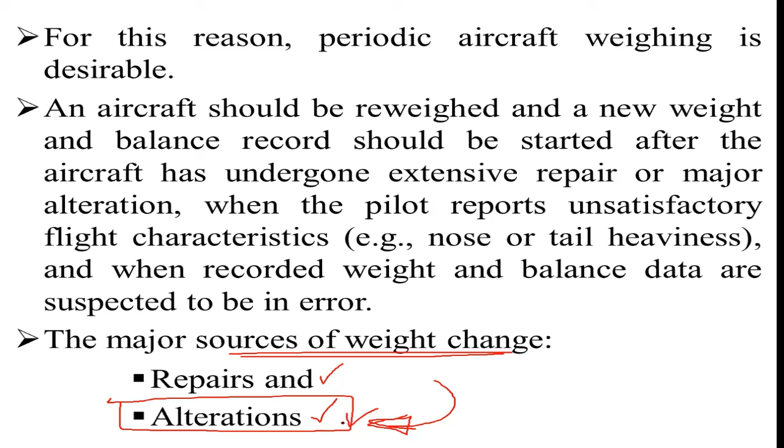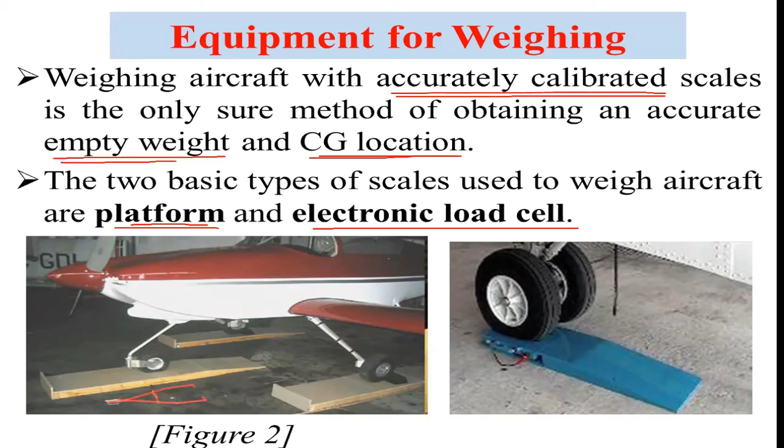Based on the type of aircraft, there are different types of weight and balance performing or supporting equipment. The two basic types of scales used to weigh an aircraft are platform and electronic load cell scales, found on the airfield, runway, or airport. These ground support technicians, technically called flight dispatchers, have this equipment depending on the type of aircraft. There are two basic types of scales used to perform the weight and balance activity. Platform scales, as you can see in this figure, are also called ramp wheels. They are usually a modified version of a platform scale. This ramp wheel, as shown in the second figure, is different from the platform scale in the first figure.

This modified type of platform is low profile, easy to handle, and safe. It's also reliable - the data or information it gives us is very reliable, and the equipment is easy to handle, as you can see.

This platform, as you can understand from the name, is a flat plate. The aircraft's main wheels or landing gears will be here, and data will be delivered through the cable, which you can read from this equipment.

So how this is performed: you tow or push the aircraft wheels or skids onto the scale pad at ground level. First, the place where the aircraft's weight and balance will be performed should be level and straight - you must check that. Then you push or tow the aircraft and put it on this scale.

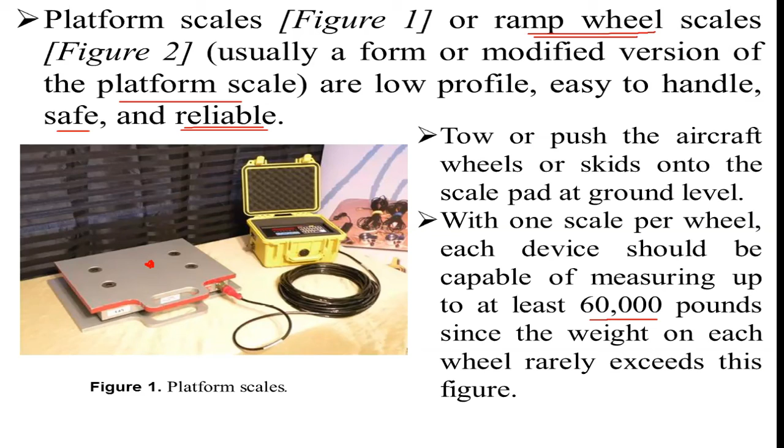Whereas when we use this electronic load cell, the aircraft should be clear off from the ground by using the jacks or hydraulic jacks. So the main difference is this one, but they are of course similar.

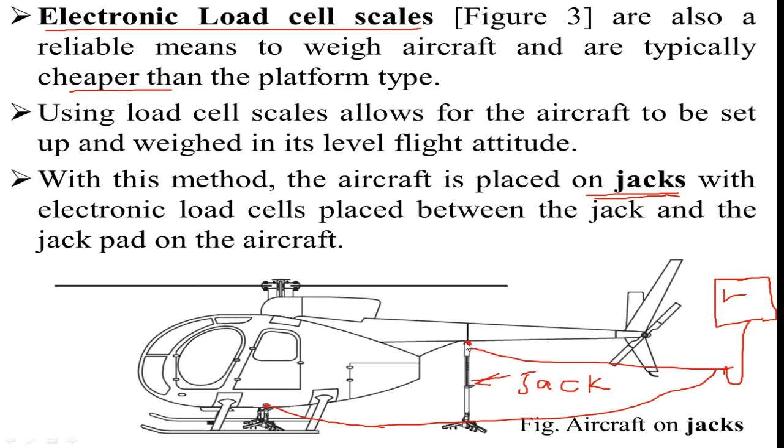And the cable will be where? Or the data cable will be on the jack point of the aircraft, so that the data will be delivered to the display based on this. Is it clear?

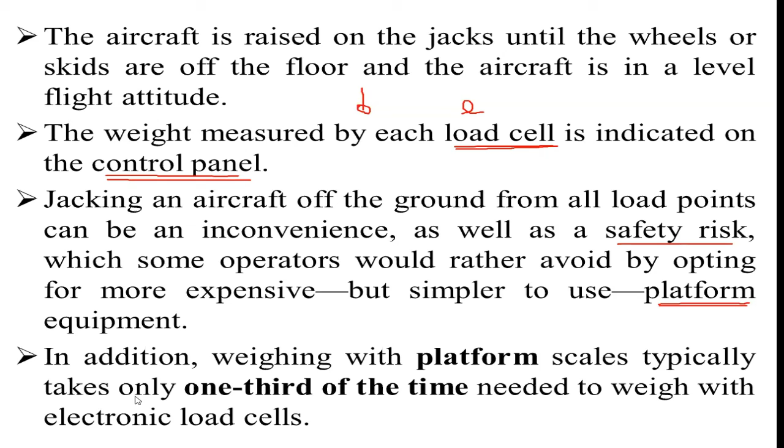So in terms of time economy also, this platform scale is more efficient than the electronic load cell type of equipment. It's one third of the time which will be taken by this one compared to the other. So in terms of time economy, this is faster than the electronic load cell one, or it's preferred.

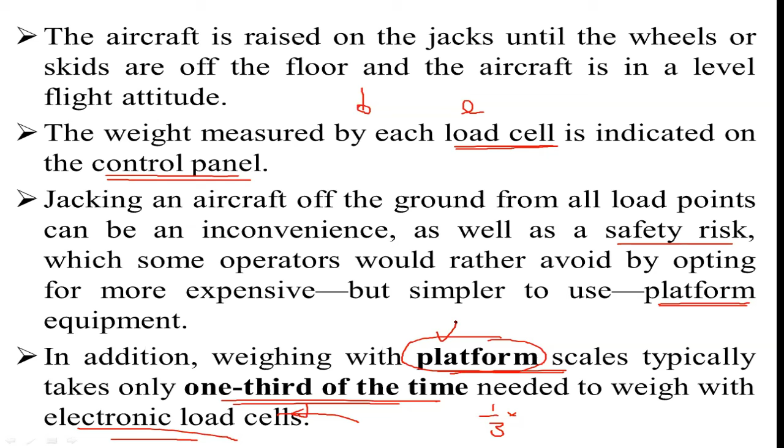All scales for aviation use, manual or electronic, whatever, must be used and protected with safety. Of course, you are already aviation personnel, joining aviation, so any equipment related to aviation, any document, manual, or electronic equipment must be protected when stored or shipped, and they must be checked periodically.

So this equipment, in order to work properly or to be used for a longer time, should be stored according to procedures and rules.

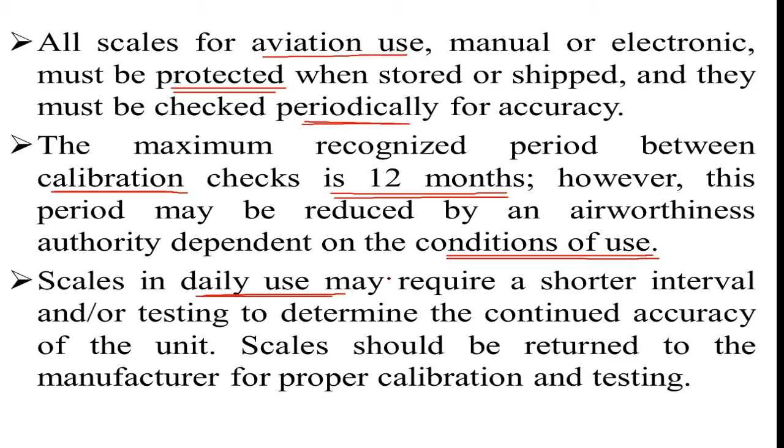Equipment that is not used periodically should at least be checked within 12 months maximum. Scales should be returned to the manufacturer for proper calibration testing. Any scale, gauges and other equipment used in the aviation maintenance environment should be returned to calibration stations or calibration centers based on the requirement.

So, preparation for weighing. In general, weight procedures may vary with the aircraft and type of weight equipment employed.

In general, the procedure we follow for aircraft weight and balance may vary from one aircraft to another, and may also vary based on the weight equipment we use. But in general, the procedures we follow are almost the same for every aircraft. However, there may be certain things that differ from one aircraft to another, so we have to follow the proper document for that specific aircraft.

So our first step when preparing to make aircraft weight and balance is to get or make ready the proper document related to that particular type of aircraft weight and balance. Getting the proper document connected with the aircraft will be our first procedure.

The weight procedure contained in the manufacturer's maintenance manual should be followed for each particular aircraft. As we discussed before, not only this document related to weight and balance, which is our topic for today, but also documents for all systems - hydraulic system, which we discussed in the first semester, landing gear, control system and so on - each document you have to get within the aircraft. So the weight and balance procedure contained in the manufacturer's maintenance manual should be followed for each particular aircraft.

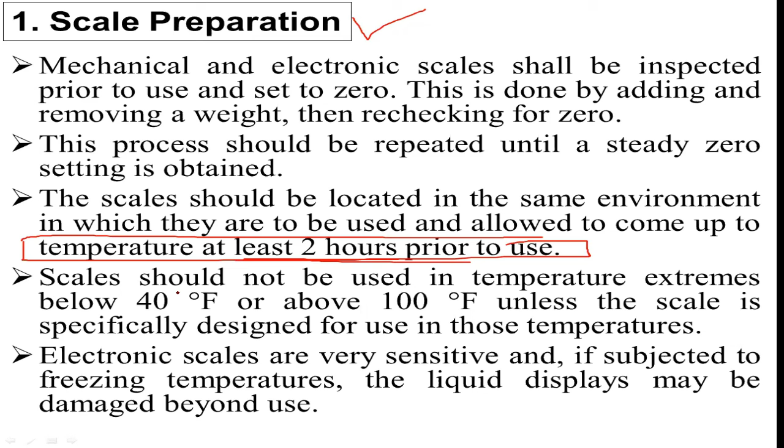The second step is to weigh a clean aircraft inside a hangar. So the aircraft weight and balance should be done also inside a hangar.

It should be worked on inside the hangar because in the outside environment there is wind, rain, or other conditions that can create or cause an error in our weight and balance calculations. So it is advised and recommended to do this weight and balance calculation of an aircraft inside a hangar. The aircraft should be weighed inside a hangar where wind cannot blow over the aircraft surface and cause fluctuating or false scale readings.

The aircraft should be clean inside and outside, with special attention paid to the bilge area to ensure that no water or debris is trapped. The outside of the aircraft should be as free as possible of all mud and dirt. Various unnecessary external agents, like mud and dirt, should be cleaned off.

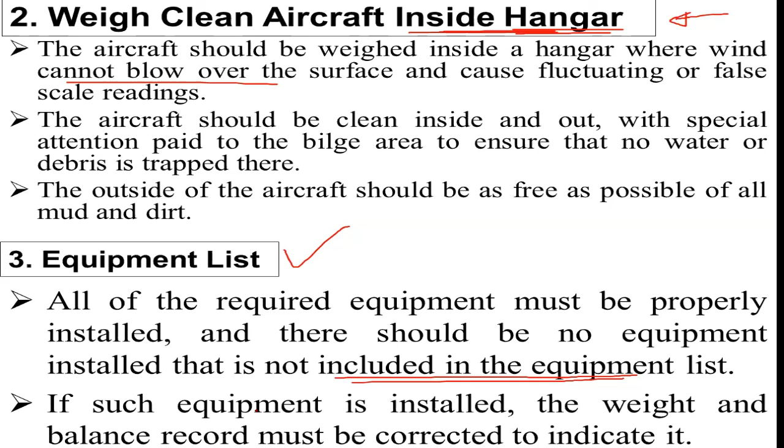Ballast is normally a kind of weight installed on aircraft to make the weight and balance of an aircraft correct, that is, additional weight. So all required permanent ballast must be properly secured in their proper place.

All temporary ballast must also be removed. There are temporary and permanent ballasts. These permanent ballasts are provided by the aircraft manufacturer, but sometimes we can also put a temporary ballast to bring our aircraft balance and weight to the desired or required limit by adding some additional weight. So the temporary ballast should be removed, whereas the permanent ones should be placed in their proper position.

Because the CG range provided by the manufacturer will normally be based on the permanent ballast. These ballasts are normally heavy material, carried in the hold of an aircraft, especially one that has no cargo, to give the aircraft increased stability, and this is called ballast.

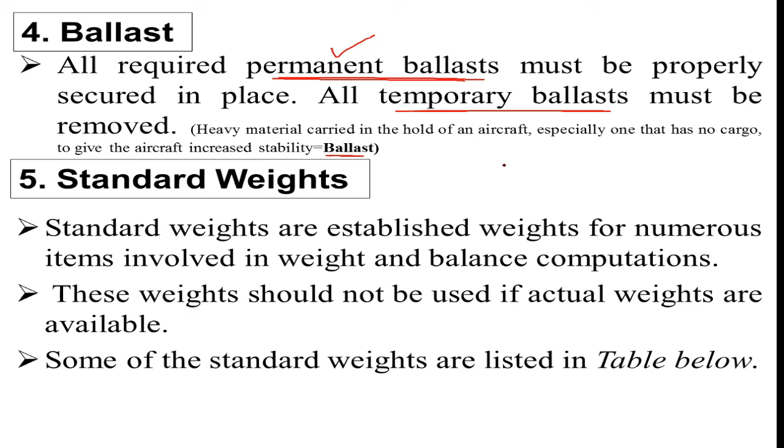So to maintain the aircraft balance, some kind of weight can be added to the aircraft. For example, there is one aircraft known as the MiG-21, a military aircraft, which is one of the aircraft that have been used by the Ethiopian Air Force.

There is some kind of ballast or weight and balance optimization weight installed in the nose section of the aircraft. So this is called permanent ballast. On the other hand, on some aircraft, we may also put a temporary ballast to bring our weight and balance to the desired position.

So this is another important point or procedure before we start our weight and balance procedures. Standard weights: there are also standard weights established. These are established weights for numerous items involved in weight and balance computations. This weight should not be used if actual weights are available.

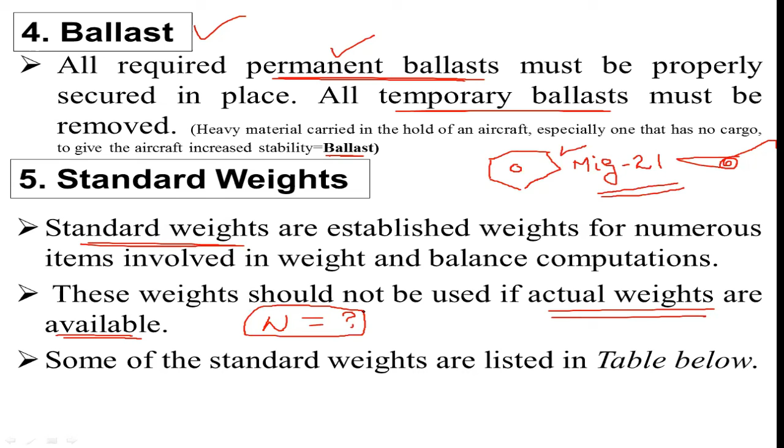Note that the weight of these fluids differs with temperature change, as by nature these fluids vary. Although this change is a very small amount per gallon, as you know, huge aircraft, especially commercial aircraft, have a majority of their weight taken by these fluids, like fuel, which is a very significant part of an aircraft's weight.

So you should not underestimate variation of weight, because for example 6.14 per gallon for aviation fuel. Very huge aircraft have to carry huge amounts of fuel in their fuel tanks, and it could be the source of weight and balance disorders. Although this change is very small per gallon, it could end up as a significant total weight gain when dealing with large quantities of fluids, such as those found in commercial aircraft. So you should not underestimate this amount of fuel or fluids, or standard weights in general.

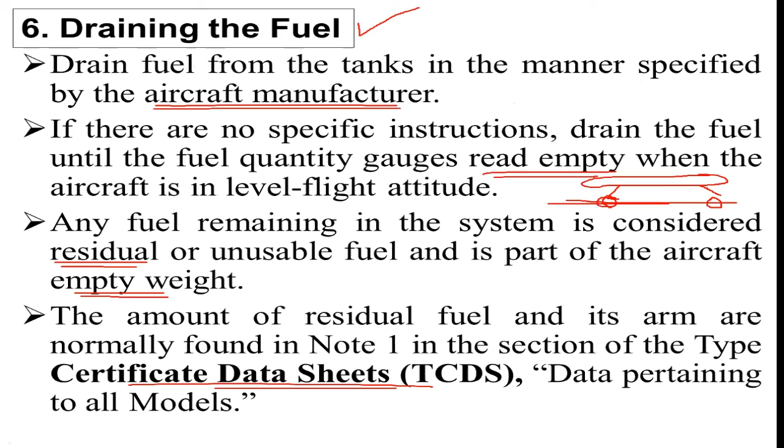If it is not feasible to drain the fuel, for example in some cases you may not be able to drain it, you should follow another technique: top up the fuel tank to its maximum level and then take the measurement based on that. Sometimes draining fuel completely is not possible, so you fill the tank fully, based on the standard data given, like the type of fuel and its density, calculate the weight caused by this fuel, and then subtract it from the total weight.

After weighing is complete, the weight of the fuel and its moment are subtracted from the aircraft's weight. So it's subtracted to correct the empty weight. For the residual fuel, you add its weight and moment back.

The other consideration is oils. There are different types of oils used in the aircraft: lubricating oils, engine oils, hydraulic oils, and so on, used in different aircraft systems, along with grease and similar substances. Therefore, one of the procedures is to consider these oils - you should empty, avoid, or drain them also.

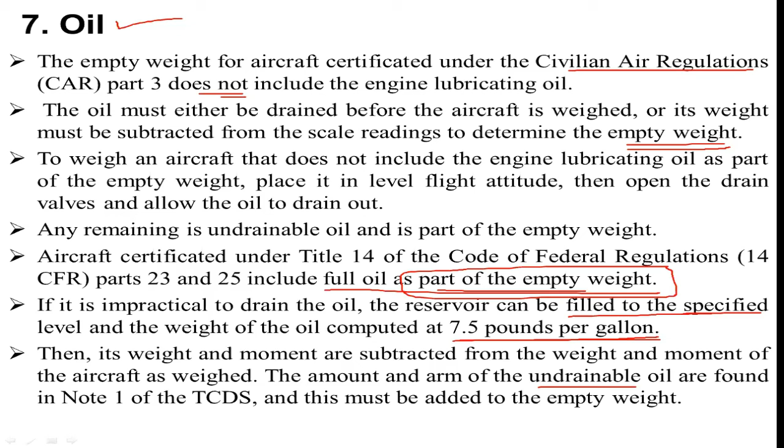Other fluids are also available. Hydraulic fluids in the reservoirs, and other reservoirs containing fluid required for normal operation of the aircraft, should be full. Without hydraulic fluid, normally you cannot even perform ground operations, so the hydraulic reservoir should be full according to the procedure, and all other reservoirs containing fluid required for normal operation of the aircraft should be full.

Fluids not considered part of the empty weight of the aircraft are potable or drinkable water, lavatory pre-charge water, and water for injection into the engines. These are not considered part of the empty weight, whereas hydraulic fluid is considered in most cases, because without it you cannot extend and retract your landing gear or operate your control surfaces, and so on. So this hydraulic fluid can be considered part of the empty weight, whereas fluids like drinkable water, lavatory water, pre-charge water, and water for engine injection, if available, cannot be considered part of the weight and balance.

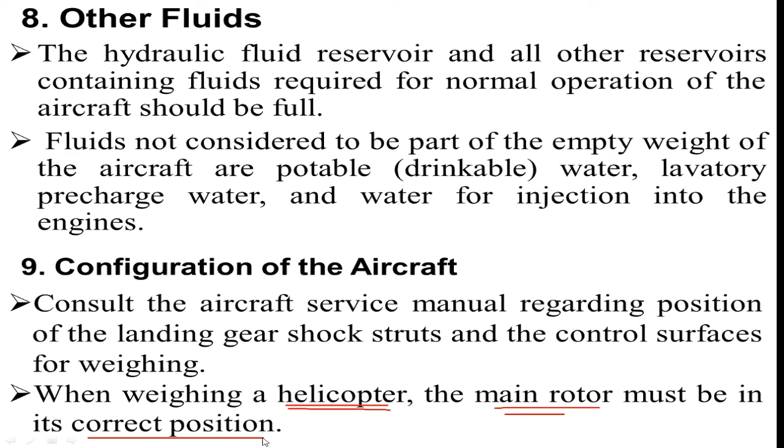The other procedure is jacking the aircraft. If you are using that type of equipment, there is a procedure for jacking. Some aircraft are weighed by rolling them onto ramps in which load cells are embedded, which eliminates the problems associated with jacking the aircraft.

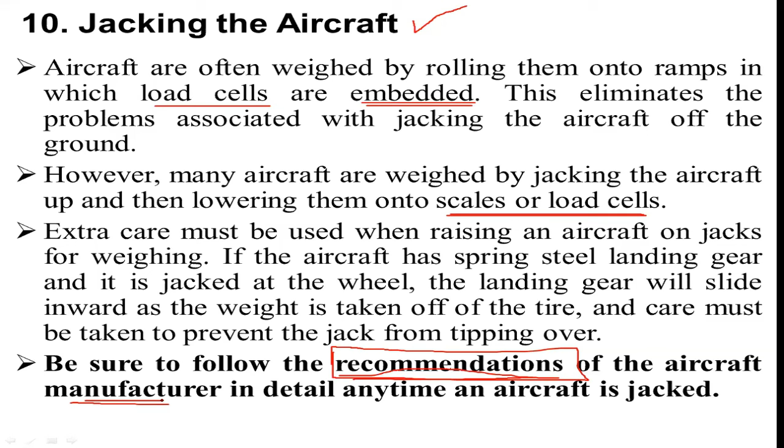Also, not only for jacking but for other procedures and tasks as well, you should follow the recommendations provided by the manufacturer of the aircraft anytime you jack up or lower the aircraft. The other procedure is leveling the aircraft.

Level. The aircraft should be in its level position before we go for aircraft weight and balance. So this attitude or the level and straight position information is found in your type certificate data sheet.

So some aircraft require a plumb line to drop from a specific location so that the point of the weight or the bob hangs directly above the identifiable point. So others specify that a spirit level be placed across two leveling lugs.

Often special screws on the outside of the fuselage. So other aircraft call for a spirit level to be placed on the upper door sill. So there are also equipment which are known as plumb line, which are commonly found with the carpenters also.

Also a spirit level can be used to check the level, or whether the aircraft is in its proper level position. You can use these two equipments. For example, this is the plumb line.

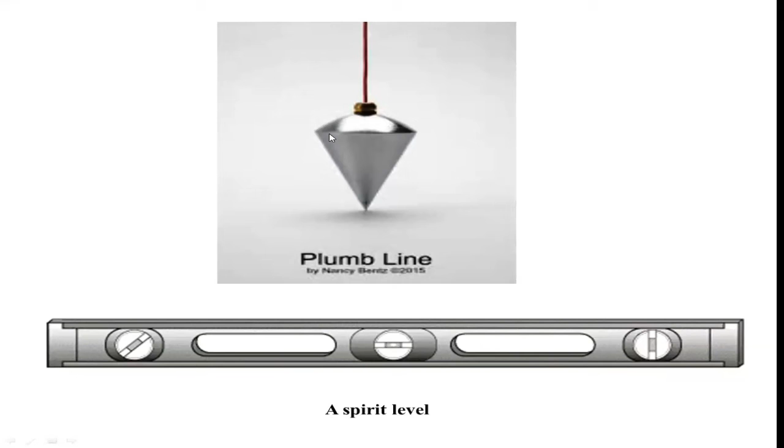The procedure is called leveling normally. You should level, or make the aircraft level. So you use different equipment as desired or as required. So these are two equipment.

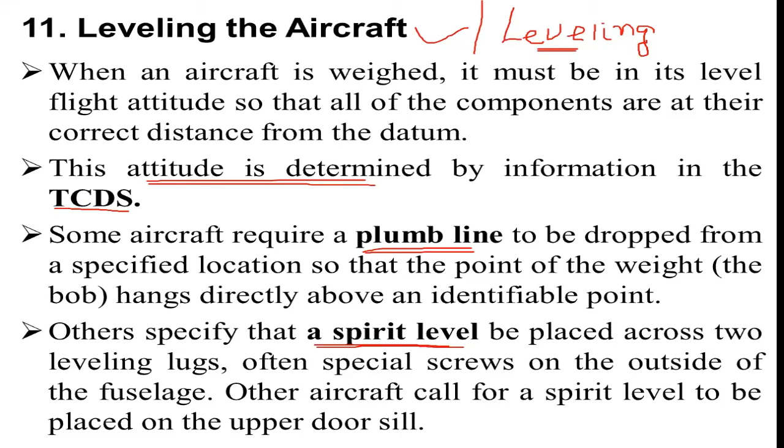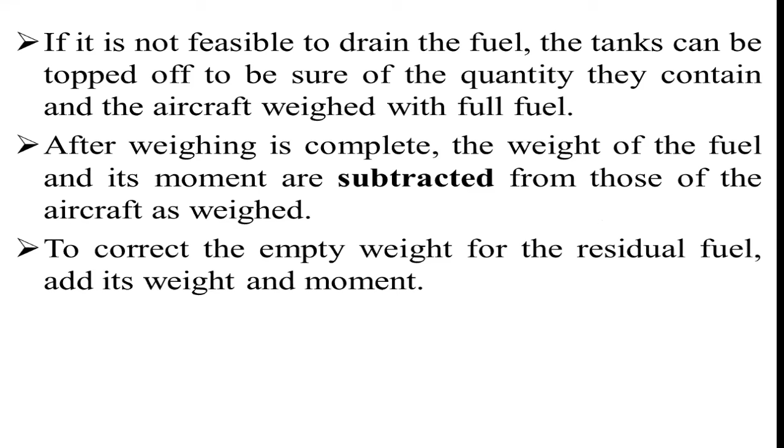So safety consideration is also another point. We have discussed normally 11 procedures that should be considered when we are preparing to make our weight and balance in our aircraft. So these are the procedures, of course there are 11 normally. So the other important thing when we are doing the weight and balance is the safety considerations.

Special precautions must be taken when raising an aircraft on jacks. So of course, there are some precautions or safety measures which should be taken when we use our aircraft on jacks also.

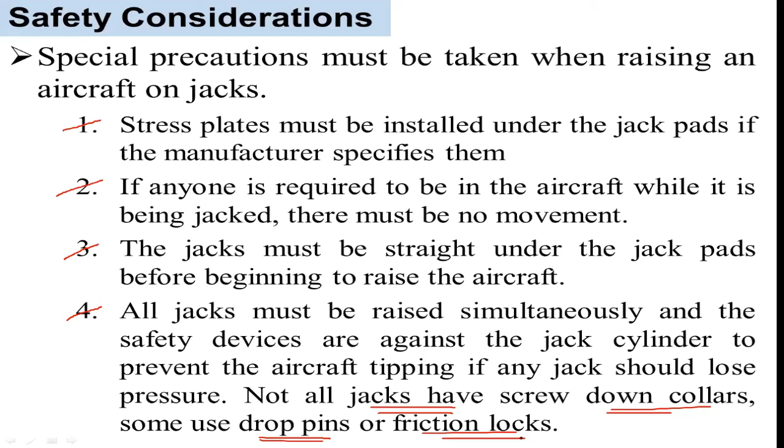Not all jacks have screw down collars, some use drop pins or friction locks. Based on the type of jack normally, some have down collars, some have drop pins, or some have friction locks. Based on the type of jack, you should follow the procedures.

So having said this, this is a preparation of weight and balance before we make weight and balance. But the ultimate goal of any weight and balance is to get the center of gravity, as we have discussed. So those we have discussed before in the previous few slides are the procedures and the safety precautions which should be taken. But the ultimate goal of any weight and balance calculation is to determine the center of gravity of the aircraft.

So when the aircraft is in its level flight attitude, drop a plumb line from the datum and make a mark on the hangar floor below the tip of the bob. So these are the procedures how you can get the desired center of gravity of the aircraft.

So you can mark by drawing a chalk or some other marking mechanism, then draw lateral lines between the actual weighing points for the main wheels, and make a mark along the longitudinal line at the weighing point for the nose wheel or the tail wheel.

This line and marks on the floor allow accurate measurements between the datum and the weighing points to determine their arms. Of course, as we have said in the previous discussions, one of the important parameters which should be known is the arm, and the weight also.

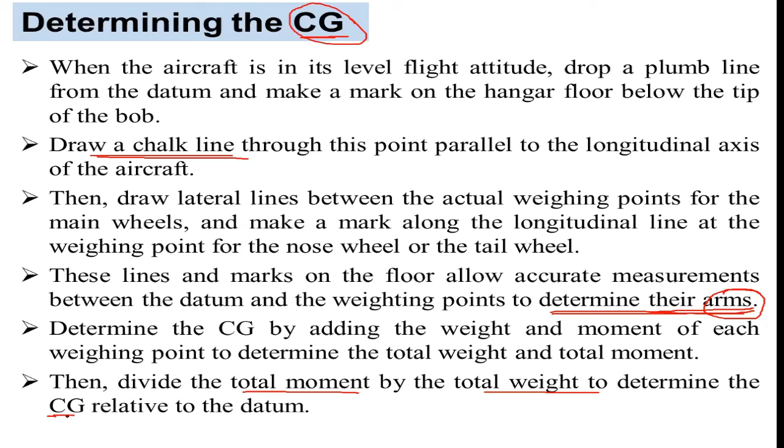And you will get the center of gravity relative to the datum line or to the reference. So these are the procedures which we have seen previously. That time we discussed only for a lever with some kind of weight, but this time we will directly calculate the weight and the center of gravity of an aircraft. For example, this is an example of locating the center of gravity with respect to the datum.

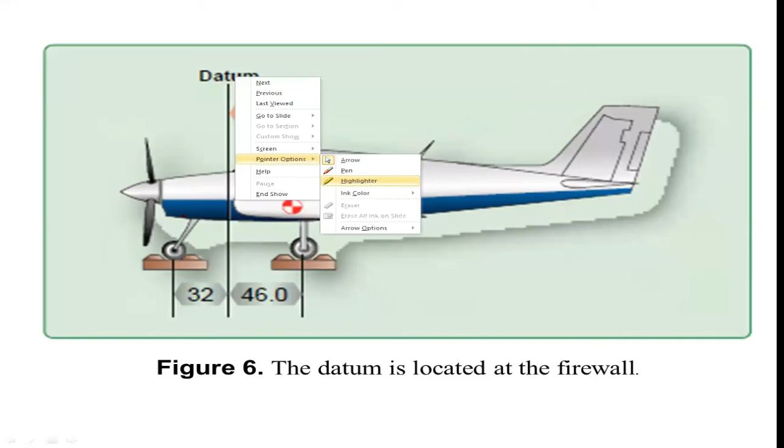So this is the aircraft with the datum here. The datum is any vertical line which passes through the aircraft. It can be anywhere - an arbitrary line normally, in the nose, in the tail, anywhere. In this case, the datum is located at the firewall of the aircraft.

And finally, you will get the center of gravity by using this formula: center of gravity equals total moment over total weight. So you'll get the CG, and also you will find the range within which this center of gravity can be tolerated.

So you'll get from your data the range of the center of gravity, and then you will load your aircraft according to this limit, or the center of gravity range, or center of gravity limit. Then you will make your aircraft ready for flight, or dispatch it, because those personnel who work on this are called flight dispatchers or aircraft dispatchers.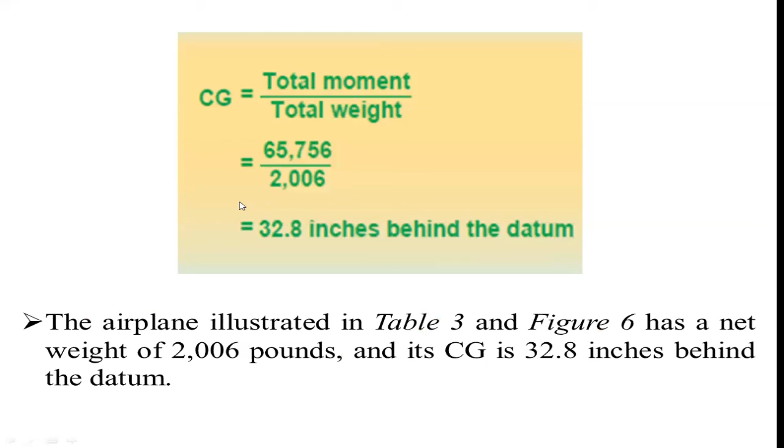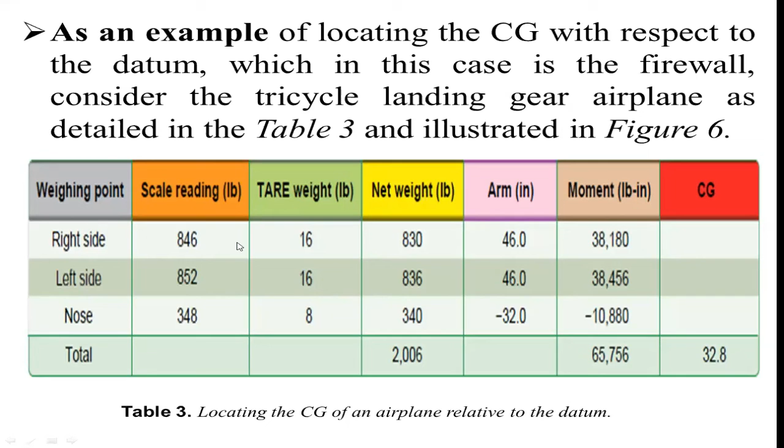The pilot will be assisted by the data provided by the personnel working on the ground, but it is quicker to determine the empty weight CG by using formulas and an electronic calculator. These charts or data provided in hard copies to the pilots will help him know what type of weight is installed or loaded on the aircraft, at what arm it is installed, and how much moment this will create and how it will affect the controllability of the aircraft.

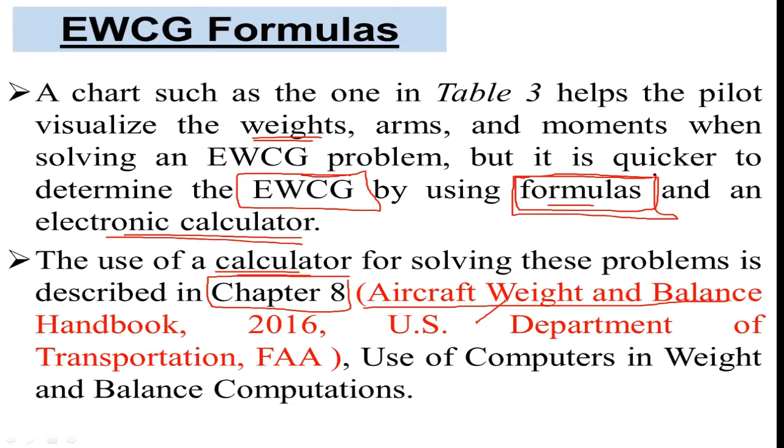But in this topic, we'll see empty weight calculations by using formulas. There are also formulas through which we can find the center of gravity.

As we have said earlier, the ultimate goal is to get the center of gravity of the aircraft based on the weights which are on the aircraft. So there are 4 possible cases in any aircraft.

When we use this formula method to get the center of gravity, we have 4 possible cases. Of course, all these 4 cases are based on the location of the datum.

The first case, for example, the datum is forward of the airplane nose. The second is datum aft of the main wheels. The third one is tail wheel landing gear. And the fourth one is datum aft of the main wheels, that is the tail wheel landing gear.

Tail wheel and nose wheel are both types of aircraft. We have discussed what type of aircraft we call nose wheel and what type we call tail wheel.

We have discussed in the first course about aircraft systems and structure. Nose wheel is where the majority of the aircraft load is loaded on the nose wheel.

We call such type of aircraft nose wheel aircraft. In some aircraft also, majority of the aircraft load is concentrated on the tail wheel. Such type of aircraft we call tail wheel aircraft.

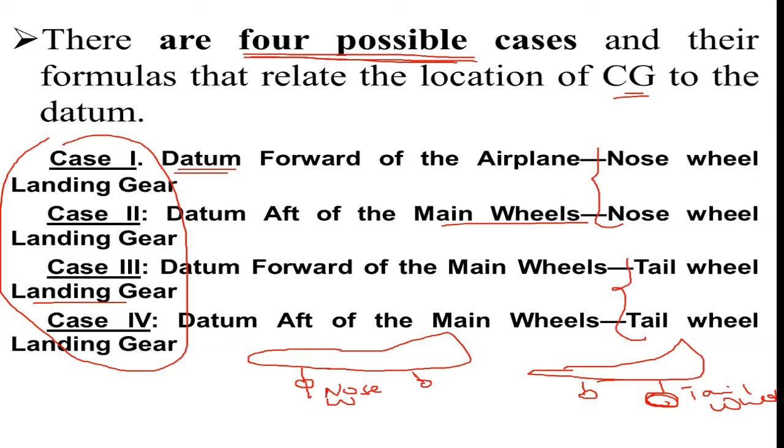Therefore we will see these 4 cases to calculate the center of gravity by using formulas. By completing these 4 cases, we will wind up our today's discussion.

So the first is datum forward of the airplane, and this type of aircraft is, of course, a nose wheel type of aircraft. The difference between the nose wheel and the main wheel is that the majority of the aircraft load is carried by this nose wheel.

Let's see. Here we have the datum forward of the airplane. So to determine, in general, we will have center of gravity equal to plus or minus d, plus or minus the force times L over the gross weight of the aircraft.

This will be, in general, the formula for all the aircraft CG calculation based on the formula. So what are these parameters for? D is the distance between the datum and the main wheel.

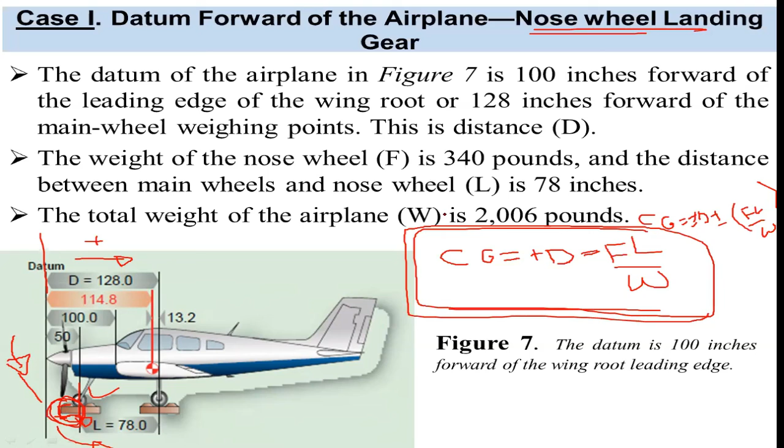The force in consideration is the weight on the nose wheel. That is F lying in this nose wheel, and here's the total weight of the airplane, found of course. We find the CG formula of such type of configuration, or in this type of case, when the datum is forward of the airplane, we'll use this type of formula, this formula.

So to determine the CG by using the formula below, you will get D minus FL over weight, and you will get this one. So the CG is 114.8 inches. And in general, for such type of configuration or position, when the datum is forward of the aircraft, you use this formula.

By using it, you will find this. So the CG is found to be, by using this formula, this much. So this is 13.2 inches forward of the main wheel, weighing points, which proves the location of the datum has no effect on the location of the CG if all measurements are taken from the same location, by the way.

They should be taken from the same location. But the position of the datum has nothing to do with it.

We have discussed also the second case, when the force in consideration is the nose wheel landing gear, of course. The force is the same on the nose. F is here. The force is here. But this time the datum is aft of the main landing gear.

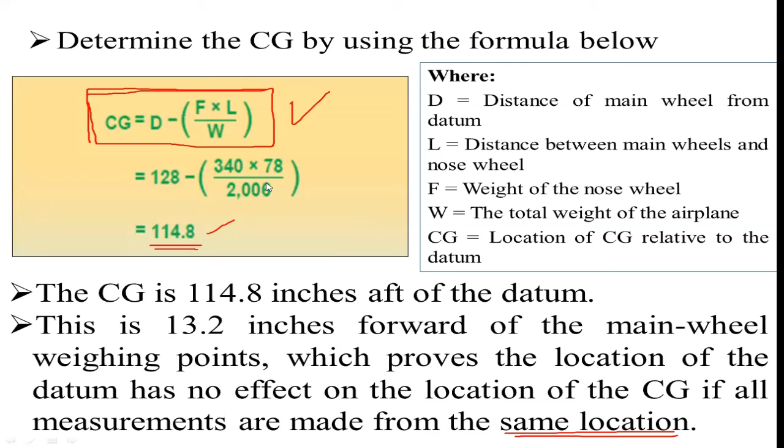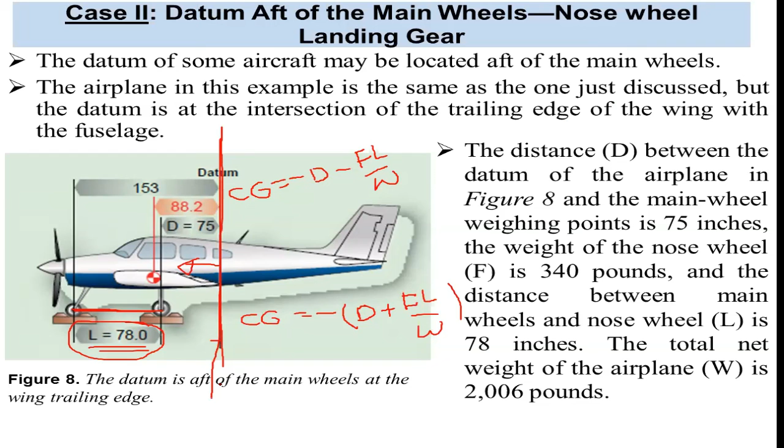If you have any question. We have derived both formulas. So using the CG location data given to us, we will use this formula for this particular case. Anyway, if the datum is at the back of the main wheel corner, main landing gear or main wheel corner, the CG location will be, then this one, it comes negative. This means negative, our CG location is negative 88.2, that's what we have. If it's 88.2 minus, this means it is to the left of the datum we select, that shows us it will be toward the left direction. Then this place is 13.2 forward of the main wheels, exactly the same location as when it was measured from the other datum location.

So when we calculate from another datum location, it comes out the same as before. So datum is any reference line by the way, and it doesn't matter. The location of the datum doesn't matter, the CG location will be the same for some specific particular type of loading an aircraft has, whether we take forward of the nose section or aft of the nose section or somewhere in the aircraft, there will not be variation in the center of gravity as far as we take all the measurements from that particular datum. So the location of the datum is not very important this time.